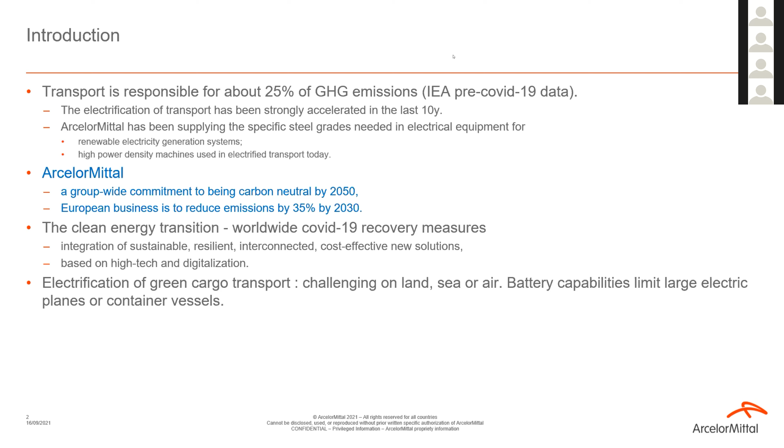So, oops, now I have a problem with moving my slides. What's happening? Yeah, maybe you need to stop sharing and try it again. Yeah, I will stop sharing and then see if I can already get the camera on. No, it absolutely doesn't like me putting the camera on. Okay, you can maybe try to share. Yeah, I'll try the screen. Share. We will see the camera for Q&A. We can focus on the slides now. Yes, indeed. Let me share my screen again. And go back to the presentation mode. Yeah. Yeah, this is better. It works. So, yeah, sorry about that.

So the particular transport system that I want to present to you today is about hyperloop technologies, and mainly because they are a very relevant solution in terms of green high-speed transport in between what's happening on the high-speed train activities and also the electrification of airplanes. The hyperloop systems obviously need electromagnetic systems inside of these tubes for propulsion, braking, levitation, and guidance. And this presentation will in particular focus much more on the propulsion system.

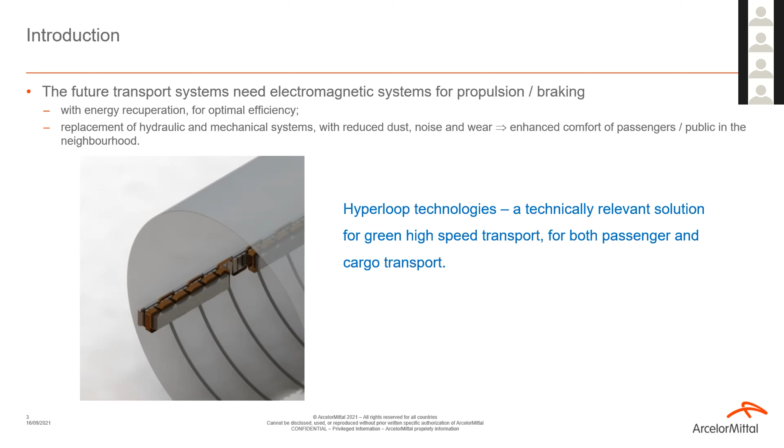The importance about these electric systems is, of course, that they need to be with a high efficiency level. We want to do energy recuperation to improve the efficiency. And apart from that, the hyperloop system is also relevant to reduce dust, noise, and there is no physical contact during the transport, and therefore it also reduces the wear that you have in normal transport systems. So it has certain advantages that are certainly worthwhile looking into.

I think I've already explained some of these aspects, but what I didn't say so far was that the hyperloop technologies use linear motors that are exposed to very high force levels in a pulsated way. So these linear motors are exploited in a completely different way than what you see in an electric car. And the control mechanisms are also very, very difficult to realize because you need a very tight control, and that is in particular the case for the levitation systems.

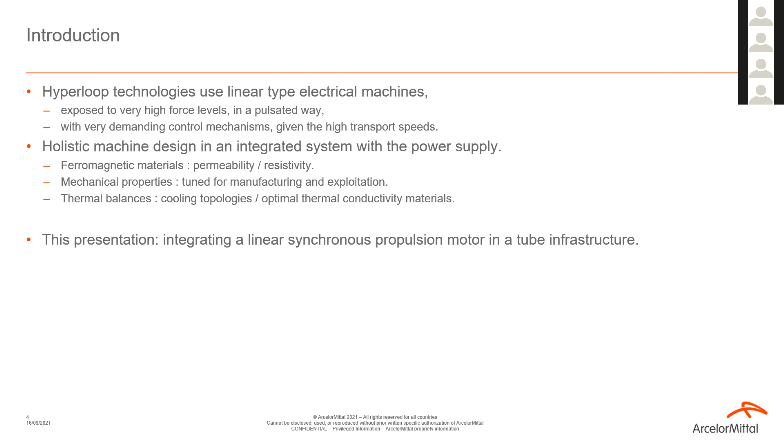So it is important to look at such a system on its whole to make a perfect combination between the ferromagnetic materials that are being used, the mechanical properties of these materials, and also to create the right thermal balance, as we saw in the previous presentation as well.

So I'm going to talk a little bit more about the use of linear synchronous machines for hyperloop. We've been calculating a machine that is with a wound field system. This is in particular because we prefer to work on systems without permanent magnets and in particular without neodymium magnets, in order to assure that we're not coming into the trap of creating a system that is using critical rare earth materials, as Fernando was saying in the introduction of this conference.

So this is the specification of the motor. We want to have a propulsion force of 110 kilonewtons, which is coherent with the needs of a pod that is propelled into the tube and that moves at the speed of maximum 1,000 kilometers per hour.

In terms of the electrical steels that we're looking at for the stator and the mover, we've worked with very basic steel in these calculations, 0.65 millimeters, just to show the importance of making the right steel selection.

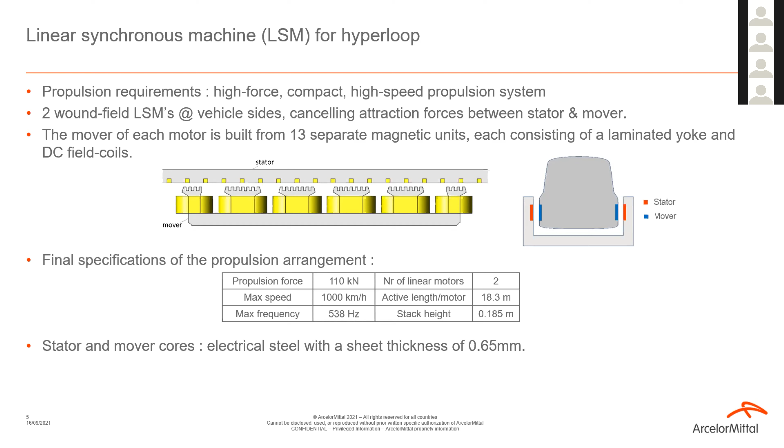When we did the first calculations regarding the losses, so the Joule losses that are happening in these fixation systems, we saw that this classic connection system of a dovetail is really not the best one to choose because you get a higher level of losses. And we had also looked, first of all, whether it was relevant to use either carbon steels or austenitic stainless steels for these connection systems.

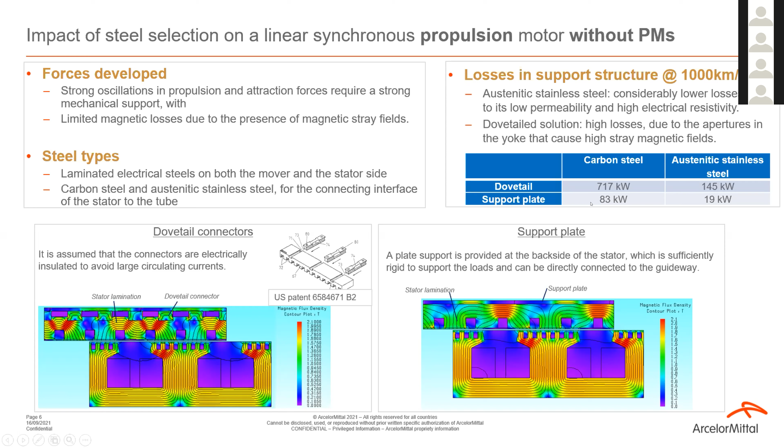Of course, with the austenitic stainless steel, you will create a shielding effect. With the carbon steel, you have the potential of having more eddy currents circulating in this backplate. And that's indeed what we find when we do the calculations. So let me go into a little bit more detail about the content of this study.

So we're now looking at a tube, which is here this side. You have the linear motor here, and we're checking how this system should be integrated, because the problem is, of course, that you create a lot of electromagnetic fields here in the stator stack, and then they can just disappear into, well, this is first of all the housing, it's a U-profile shape, but then it can create a flux that goes straight to the tube, and therefore it's not bringing any advantage to the system.

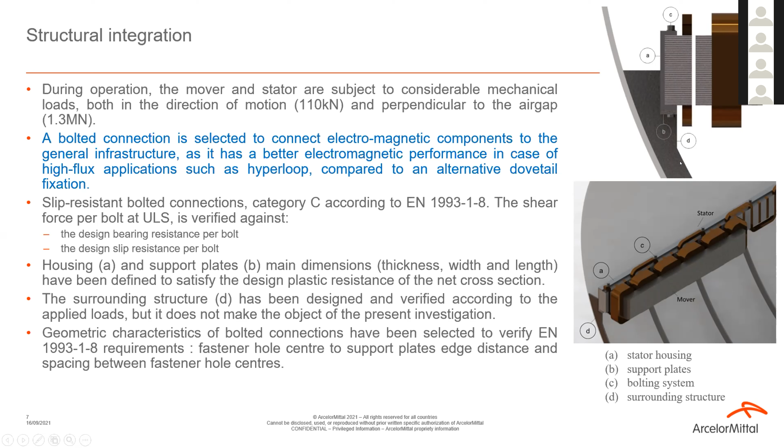And therefore the mechanical integration is first checked according to the different standards that need to be applied. And remember that we have very high forces that come through when the pod is passing by, and we assured that the whole of this connection system is going to be resistant to the mechanical forces that we want to apply from the machines. We've done this with a bolt connection through the stator stack and through the stator housing.

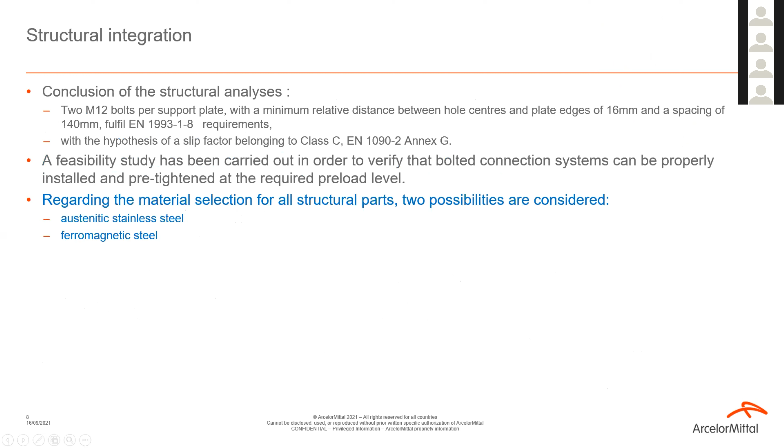And we will now go into a little bit more detail on how such a stator stack can be built. First of all, there is this point. We're going to create a system with 30.5 megawatts of power, which is quite big. And we need to model the losses. First of all, you can see here some work we did with the two-dimensional modeling.

And it's clear that we need input data from the materials. We've done the magnetic measurements on these materials according to the IEC standards. That's mainly resistivity and permeability as an input point, first of all, for the losses, and here also for the force calculations.

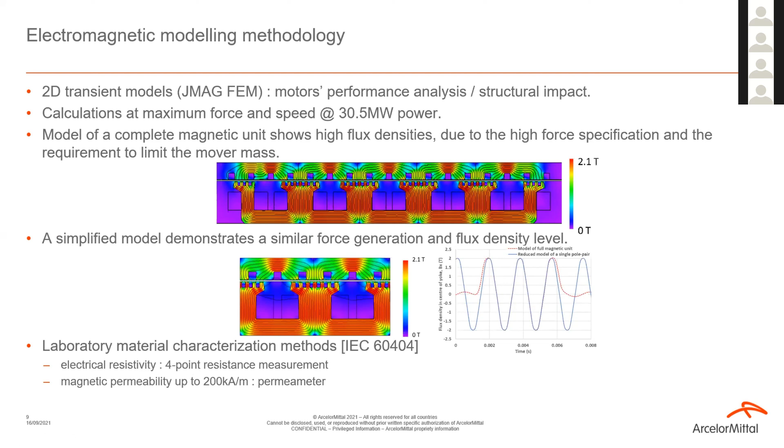The results that I wanted to explain are, first of all, again, what is happening inside of the supporting structure, depending on whether it's being fixed by using stainless steel, in this case austenitic stainless steel, or by using carbon steel. And then the next step, of course, in the integration is the fact that we need to put in these bolts, and therefore you have holes in the system and you create a distortion of the magnetic flux.

We first of all checked the best position to place these holes, and then looked at the impact such holes have on the creation of the required force level. You can see it's not all that important. What is important is the Joule losses you have here in the backplate, and they are quite different between stainless and carbon steel, as we saw before, without the presence of the bolts.

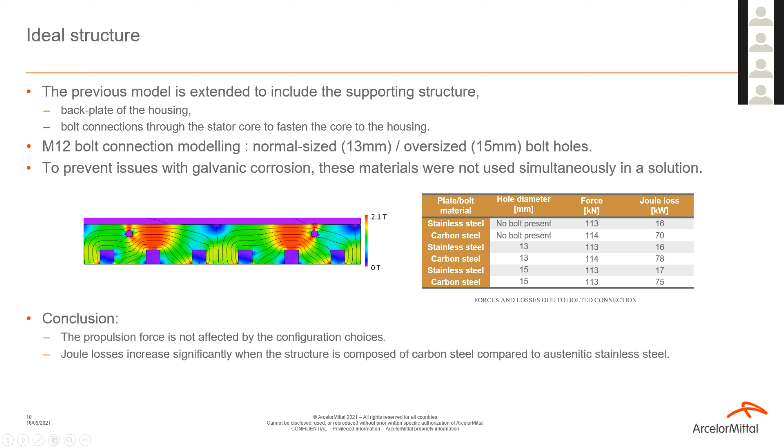Please note that we used here oversized holes for the bolts because we wanted to see the effect of the contact that is made between a bolt and a hole. And that is the next aspect. We will always have some sort of misalignment because this is a very big construction. There will be some tolerances that are needed in order to be able to build it.

And therefore the bolt is never going to sit in the center of the hole. So we looked at the different possibilities in terms of oversizing the hole, in terms of putting the bolt in an eccentric position, and whether or not there is going to be a contact.

And I'm sure it's very obvious, but here we have it quantified that the losses are sort of doubling or even tripling when you go into the contact position, which is definitely important to avoid. And the other point that is already interesting to see, that if there is just a misalignment, then it's not that bad. It's really the contact that makes the biggest problem in terms of the flux redistribution and the loss creation.

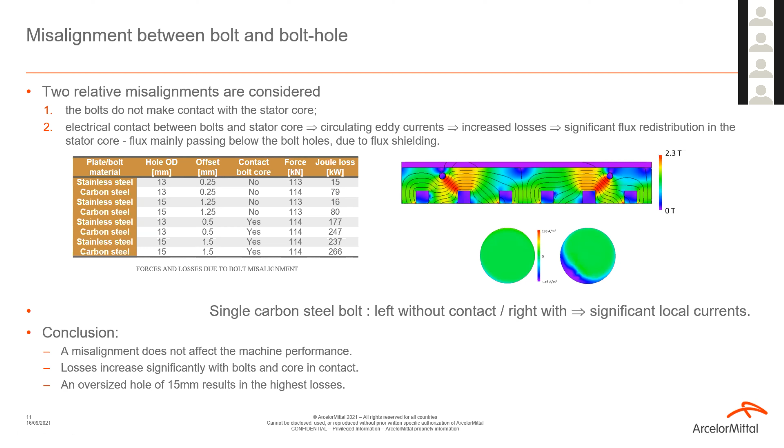The next step, when you want to build such a system, is that, of course, you cannot create meters and meters of electrical steel stacks that are going to be necessary in the whole length of the tube. So therefore, you will have to work with a segmentation, and that creates a parasitic air gap. The same way when you have a rotational machine, you could also work with segments and you would have parasitic air gaps between the segments.

Here, the parasitic air gaps are first of all assumed to be 0.5 millimeters, just to cover for the basic linear expansion. In practice, they can be bigger if you want to be sure that you cover for all the construction tolerances. So first of all, we made this calculation for 0.5 millimeters, and the Joule losses are obviously, again, increasing when we look at a carbon steel backplate. The fact that we create this segmentation with just 0.5 millimeter doesn't really impact the total force that is being developed. But the point is really that you have an increase in losses.

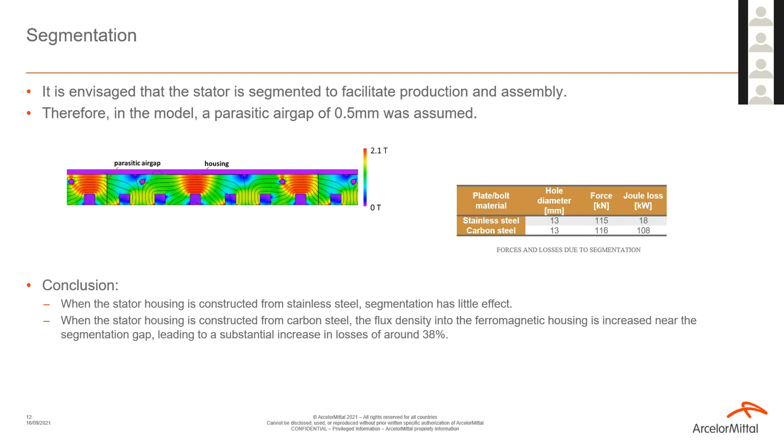The way we've drawn it here, you in fact force the flux to go through the backplate at these moments of segmentation. So in this case, the housing is like a continuous profile and the stack is interrupted. There could be other possibilities of building the construction where you would also interrupt the backplate here, and then, of course, the situation would be different. But again, it's important to realize how the flux patterns are going to change when you have to make these construction measures.

Then let's now look at the total losses of the system. First of all, it's interesting to see that on the mover side, the most important part of the losses are the copper losses, which is in fact quite logical. They are occurring with higher frequencies because you have the harmonics, and therefore it's not surprising that you have on the mover side much more copper losses than you have on the stator side.

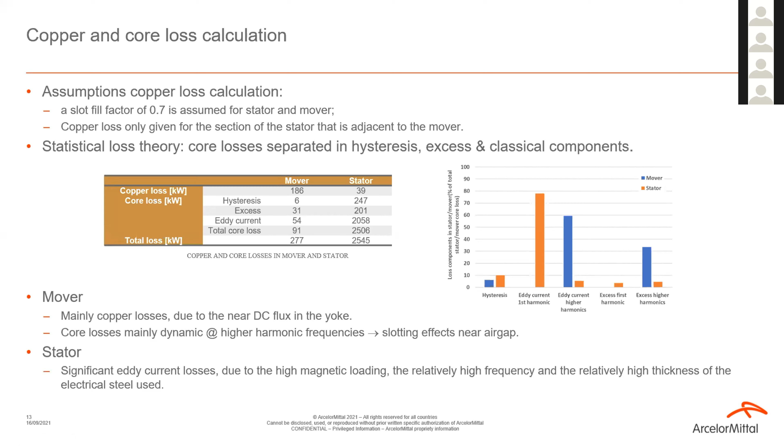Then if you look at the division of the core losses, you see that we get this very high eddy current loss level on the stator side. And that's because we've got a machine which has a high magnetic loading, and the thickness of the electrical steel was 0.65 millimeters. And therefore it's very clear that this is not an optimal choice if you want to build this kind of machine.

So I've gone through the presentation quite quickly. I've tried to explain how a linear synchronous propulsion machine can work for a hyperloop infrastructure, to show that you have to make many more calculations than the basic assumptions you would start with. It's very important to consider the integration part, to look how you will fix it, what is going to happen with the surroundings of the motors, how you will assemble the laminations, how you will put them in the stator housing, and that you take care about every single aspect of this construction process.

It's important to realize where the stray fluxes will go to, and it's also important to put stainless steel parts there where you are going to have a problem of fluxes going into stray parts of your construction.

The aspects that are very important to take away from this presentation are that it's really relevant to check all the different steel types that exist and that can certainly be used for these hyperloop systems, the very particular steel choices that we have available, because very often it is thought that those linear motors can be quite basic and therefore you can just use basic steel types, but absolutely that is not going to bring you the best high efficiency solution. And it's clear that hyperloop can only become a relevant solution for the future if the global energy performance is good and even better than the existing solutions of today.